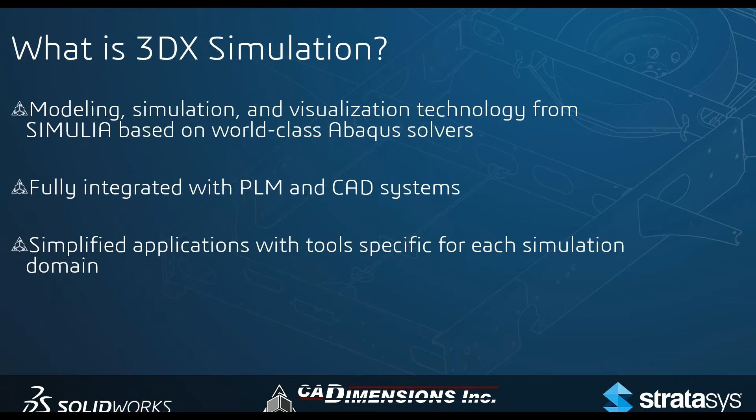And the nicest thing in the last bullet point is it's fully integrated with the 3D experience platform. We'll see that throughout this presentation, where it makes it very easy to collaborate with coworkers, shareholders, whoever you need to get your data or your results to. It makes it very, very easy to run through that.

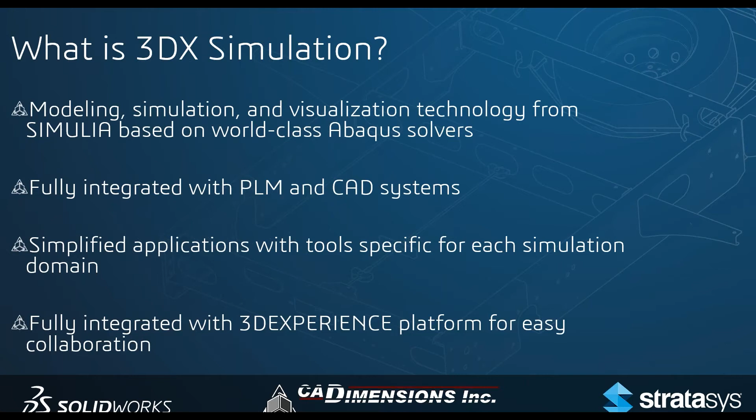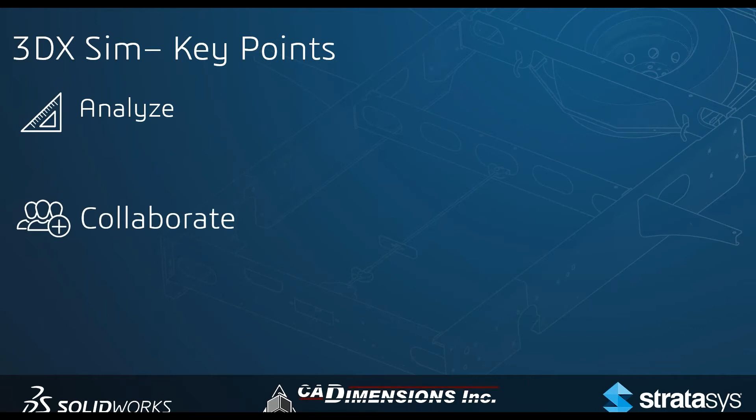In this presentation I've got 3 key points I want to hammer home on 3DX Sim. The first one is analyze—what can we actually do with this software? And then the next 2 we have collaborate and manage data. So we're going to focus more on the first point, and then we'll wrap back up with the last 2 points.

If we take a look at the 3D experience platform, we have several different simulation domains on the platform. The first one is structural simulation. This is the platform equivalent of SOLIDWORKS simulation. We have 3 levels of desktop simulation, if you guys are unfamiliar: simulation standard, simulation professional, and simulation premium on the desktop. The structural domain on the 3D experience platform is very similar—we have several different levels or applications that we can use to access different features.

We also have a new capability expanded earlier this month with durability. We have fatigue studies on the desktop portion of SOLIDWORKS simulation, so we brought that to the platform. So we can now feed our results into our durability studies to make sure that we have fatigue analysis to make sure that our parts aren't failing prematurely.

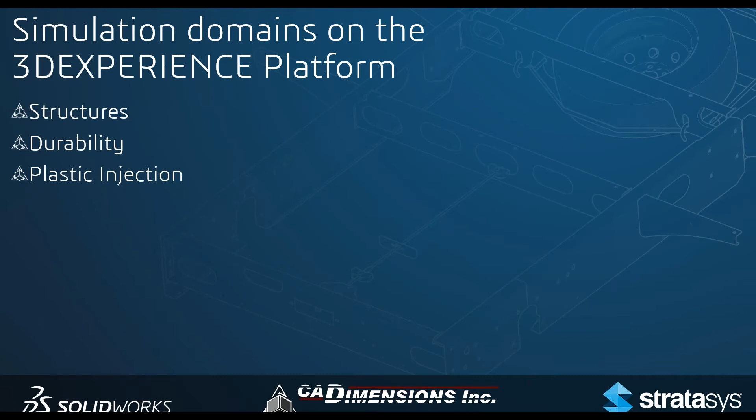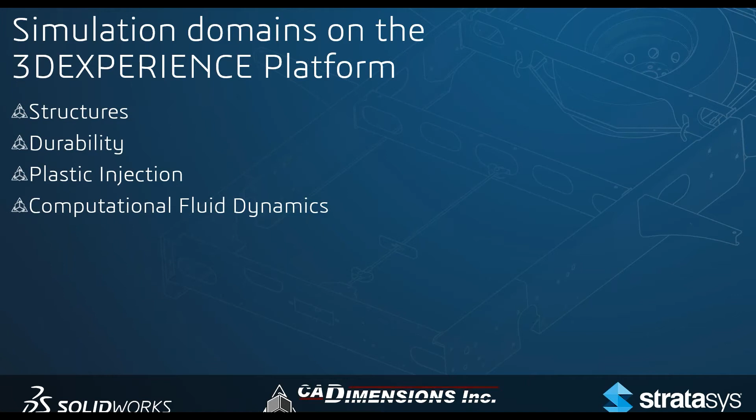We also have more specialized domains on the platform. We have plastics injection, we have a flow simulation role or a CFD role—computational fluid dynamics—and then the last domain is a little bit different because it doesn't actually directly deal with setting up and solving simulations.

What it does is allow us to take a look at the post-processing data and leverage the post-processing so we can access studies that our coworkers have done or studies that somebody else has done, and we can make design decisions based off of that. So I've got 5 different domains that I'm going to cover today, and we're going to go ahead and start with the structures domain.

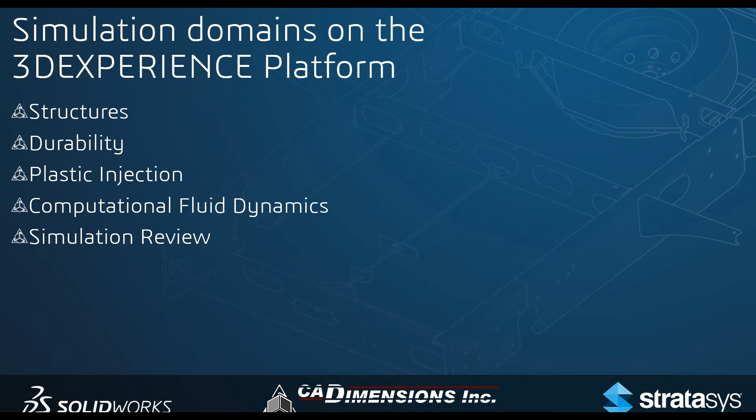The first role, or first segment of the structures domain, is called Structural Designer. This is a nice intro to both simulation in general and simulation on the platform, because it comes with a guided assistant that walks new users through the workflow, whether they're new to simulation in general or new to simulation on the 3D Experience platform. It walks us through everything from creating a study to setting up our mesh, boundary conditions, restraints, and applying material, then we can run the study and look at all the post-processing options, just like on a desktop solution.

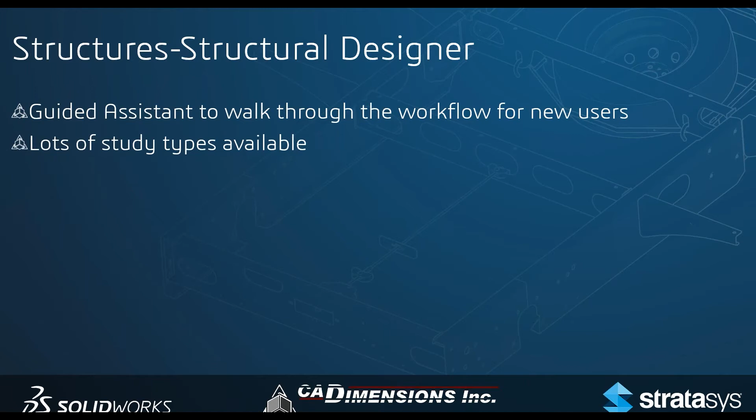The nice thing about Structural Designer is that if you're familiar with SOLIDWORKS Simulation Standard, we really only get linear static studies there. With Structural Designer, we get a bit more - it's a combination of studies from Desktop Simulation Standard and Desktop Simulation Professional. We get linear static stress studies, frequency studies, thermal studies, and buckling studies to see if our parts will fail in a buckling mode. So we get 4 different study types: linear stress, natural frequency extraction, steady state thermal results, and buckling results - more than we'd get with Desktop Simulation Standard.

We have our standard engineering connections that you're already familiar with if you use simulation: pins, springs, bonded connections, rigid body connections, bolt connections - all sorts of tools to help make our studies more robust and physically realistic.

The really nice thing about the Structural Designer role is that we have an automatic mesher, so we don't even have to worry about the mesh because it's automatically created in the background. We do have control over local mesh refinement - we can control element size and mesh controls on faces, edges, and vertices. So we still have control, but the basic mesh is automatically built in the background. In the assistant, the mesh has a green check showing it's already built, and we can take control of it if needed. The automatic mesher is great because we don't have to worry about it.

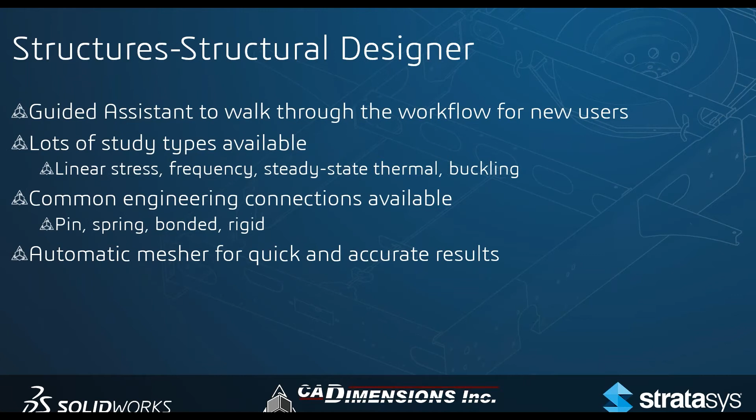We can cross that off the list, and only have to worry about our materials, restraints, loads, or boundary conditions, then run it. This is our base level of structural simulation on the platform. There are 4 different levels to structural simulation, and Structural Designer is the first one.

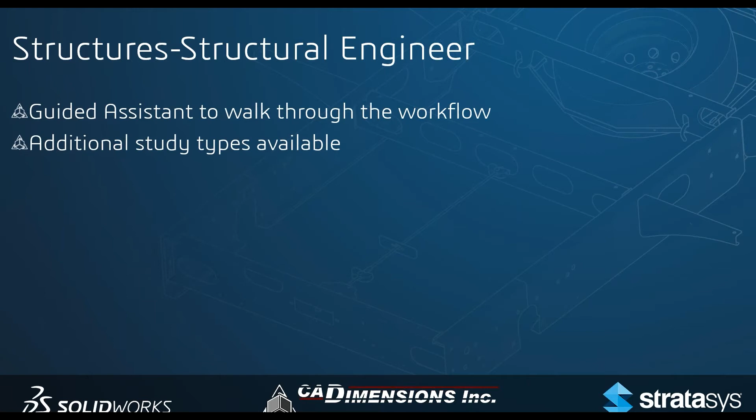The next one is called Structural Engineer, and it's almost exactly the same, except we get access to one more study type. We still have our guided assistant to help walk through the workflow, and we have an additional study type available. We still have linear stress, frequency, steady state thermal, and buckling studies from Structural Designer, but with Structural Engineer we also get access to linear modal dynamic studies - meaning if we're looking for the frequency response of a system or the time-dependent response, we can use Structural Engineer to pull out that information.

All of these levels simply build on each other - we don't take anything away, we only add more in. So with Structural Engineer, we're adding modal dynamic studies. If we needed a frequency response - say we had an engine block subjected to a series of frequencies and needed the load response - we could do that. Or if we knew we had a time-dependent loading condition, we could use Structural Engineer to pull out that information.

Just like Structural Designer, we have a bunch of engineering connections available - pins, bolts, springs, bonded connections, rigid body connections - and we have that really nice automatic mesher. So even though we're increasing the study types available to us, the automatic mesher does a lot of the hard work in the background for us, so we really don't have to worry about it.

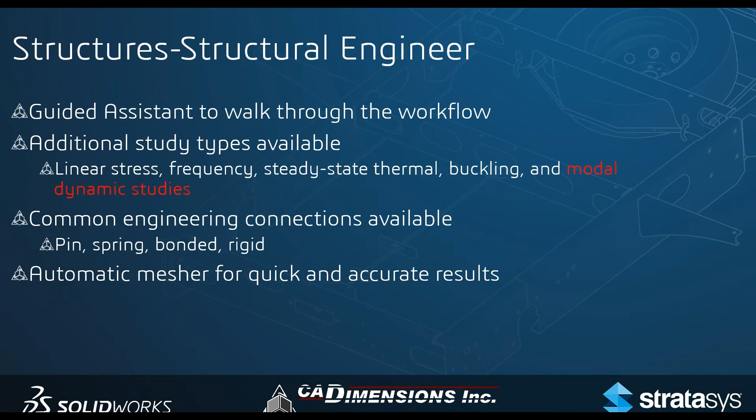The next level of structures is something called structural performance engineer. And this is where things start getting really, really cool.

We have more study types available again. So we've got everything from the previous modules or roles, but now we get into non-linear things. We've got non-linear studies where we can do time-dependent or pseudo-time-dependent loading. We can access more advanced material models like hyperelastic models.

So we could model really complex rubber materials or elastic materials. We can model things like metal plasticity, so if our metal yields, we can model that.

We have something called the Material Calibration app, which we'll see in a second and which is really nice because it allows us to take the raw test data from our tests, maybe feed that in as an Excel file or a CSV file. SOLIDWORKS on the platform will calculate our performance curves or stress response curves for us and calibrate it to make sure we're getting an accurate material response in our simulation.

We also have access to more advanced meshing models. In the first two levels of structures, structural designer and structural engineer, we had only access to tetrahedral or pyramid elements in our mesher, which is what desktop simulation uses, if you're familiar with those.

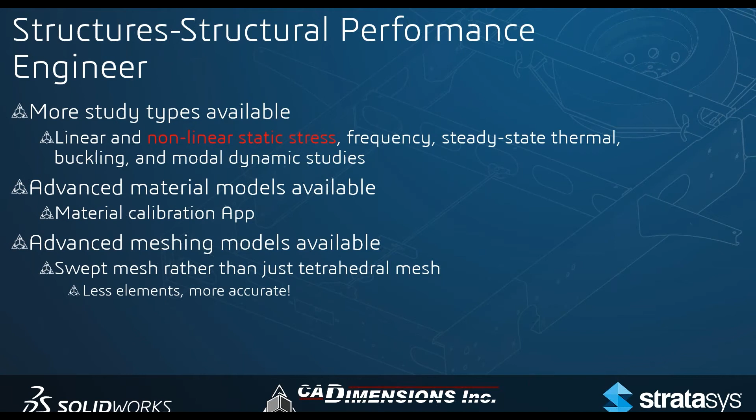The last role, or the last piece of the puzzle in terms of the structures domain on our 3D Experience platform, is something called structural mechanics engineer. This is the full unlock, the full keys to the castle of the power of the 3D Experience platform.

So we have all of our available study types for us. We have linear and nonlinear static analyses. We have frequency analyses, steady state or time-dependent thermal analyses. We have buckling studies, linear dynamics, and something called implicit and explicit dynamics. This is where things get really, really cool.

And we'll see a couple of examples in a few slides. The explicit dynamic solver allows us to model super high energy events like impact events, drop tests, crushing, crash tests, things that we simply can't do, or it would be very prohibitively expensive to do on our current desktop solution. The explicit solver on the platform solves these things no problem.

We also have access to multi-step analyses, so we can actually sequence our loading. If we're dealing with bolt fasteners, we can do a preload step, and then apply the forces or pressures or torques that are going to be applied on our model once the bolts are torqued. So we can do multi-step analyses, or thermal structural interaction, where we have one step where we heat our assembly, and another step where we can calculate the stress response.

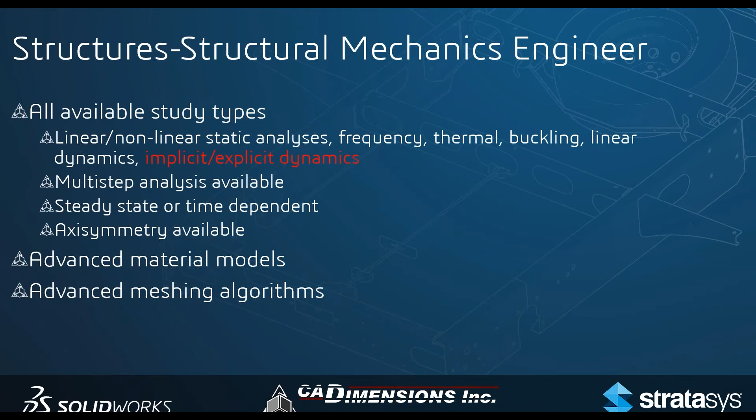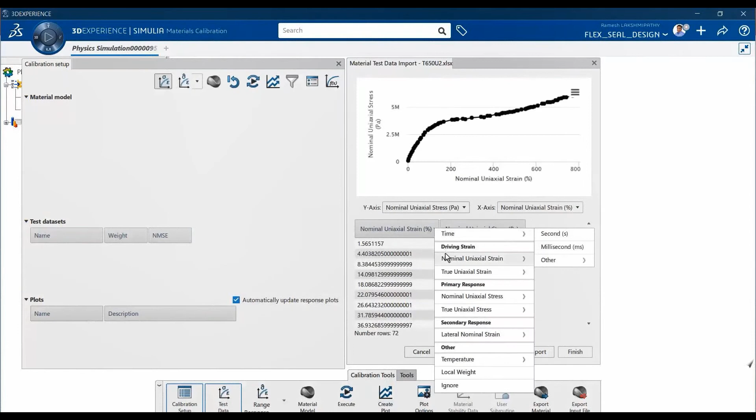We've got our material calibration app here. In this case, we're actually importing raw data right from an Excel file from a test. We can see our material curve, and we can specify whether it's true strain or nominal strain. We import that into the platform, and we specify that we want a hyperelastic material response.

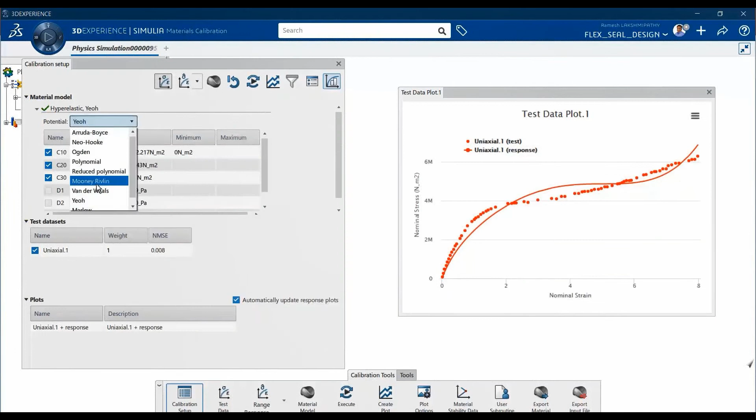In this case, we have different potentials here. We've got the Mooney-Rivlin model, the Yeoh model, and we can see SOLIDWORKS calibrating and trying to fit the curve as best it can. In this case, we're trying the Van der Waals model, and that looks really, really good. But we can take a look at our material stability and see that, at this strain rate, the material is actually unstable. So we're going to go back to the Yeoh model.

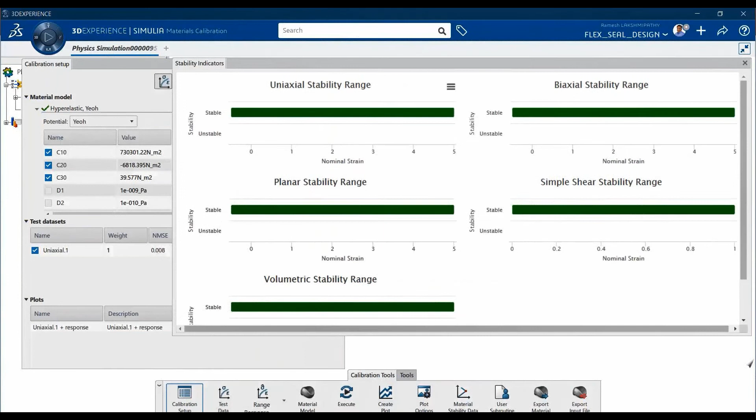In this case, we've got good agreement between the test data and our material curve, and we're stable across all ranges. Then we can go ahead and export this material and actually use it in a 3D Experience simulation. We can take all of the raw data, and in this screenshot we've got the Yeoh model constants, all the different constants that SOLIDWORKS has calculated from our material data. It did all the hard work for us and gave us a material curve that fits our data, so when we use that material in a simulation, we get an accurate material response.

So again, this is our material calibration app with structural performance engineer and structural mechanics engineer. It is super, super cool. I love using this to calibrate rubbers, metals, anything we have test data for. We can feed this in, and SOLIDWORKS or the 3D Experience platform will generate a response curve for us.

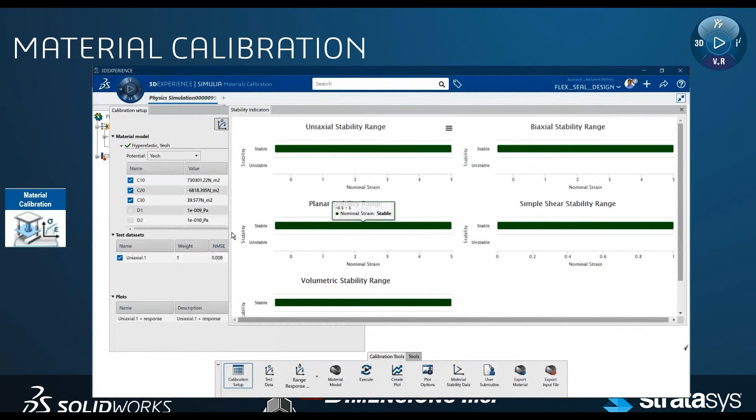The next piece that I love about the 3D Experience platform and structural mechanics engineer is the Explicit Solver. High energy impact problems, like a snap fit on the right-hand side here, or the drop test response of this brace on the left-hand side, would take forever to solve in desktop, if they solved at all. With the Explicit Solver on the 3D Experience platform, this is no problem for the solver to handle. High energy impact problems like a drop test or a snap fit, they don't even flinch in terms of actually getting the solution for us.

So the Explicit Solver in structural mechanics engineer is one of the coolest things that has been added in terms of simulation that we have access to, in my opinion. We've got super high energy snap fits, and we've got this drop test here. We can see as it starts to rebound from the floor, it starts to kind of resonate. We've got advanced material models in here as well.

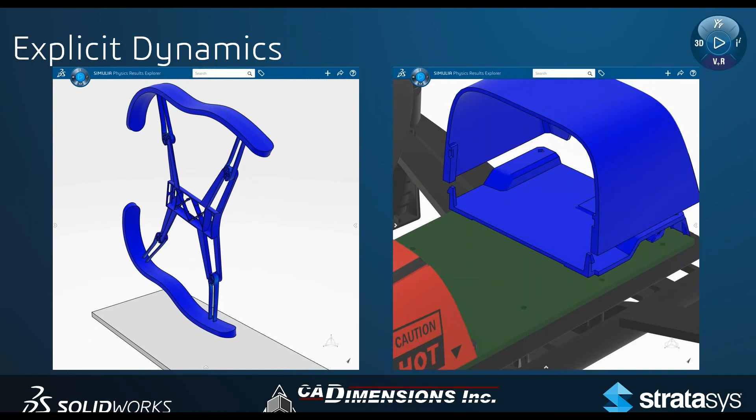We've got everything we need to handle basically whatever we need to simulate. We can do a whole bunch of things in the structures domain. And I haven't even talked about the plastics domain or flow simulation yet. We're still focusing just on structures. We can do things like bird strikes, damage modeling.

One of the really nice things about the structural aspect on the 3D Experience platform is we can now model damage like this. On desktop, the mesh doesn't actually update once it's generated. On the 3D Experience platform, we can update the mesh and remove elements that have been damaged too much, and we get results that look exactly like that, where the blade actually starts to fracture. So we can model things like necking and fracture, and do all sorts of things we simply can't do on desktop.

We can do super high energy impact things like door crash or a drop test on this prosthetic foot. Things like this would be very difficult and time consuming to solve on our current desktop solutions, where the 3D Experience platform doesn't even really flinch at it.

We've got really super complex contacts and buckling of this elastic seal, where to define all of these different contact sets in SOLIDWORKS desktop would take forever. We'd have to guess and check and make sure everything's working correctly.

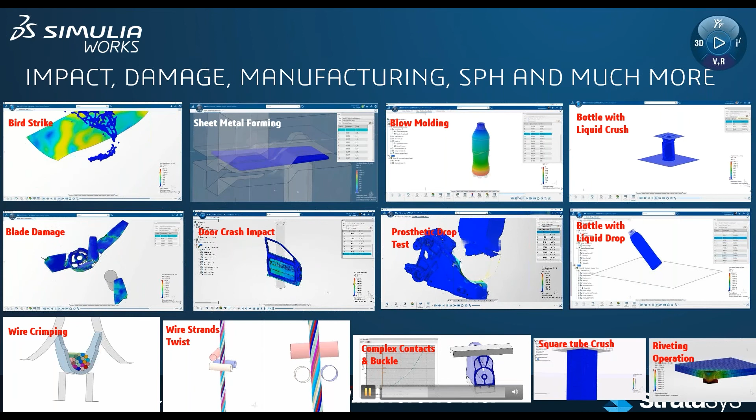We can do all sorts of advanced deformation, like this square tube being crushed. All of this complex buckling phenomenon down here just simply would not be possible in the current desktop solution.

One of the other really nice pieces they added to the platform is the ability to model liquid particles. In this case, we've dropped a bottle that's got liquid sloshing around it. This is due to a technology called SPH particles, or smoothed particle hydrodynamics, where we can actually model the effect of having liquid inside of our bottle.

In this example up here, rather than dropping it, we can actually crush the top of the bottle and watch the liquid shoot out. We simply can't do this in the current desktop solution.

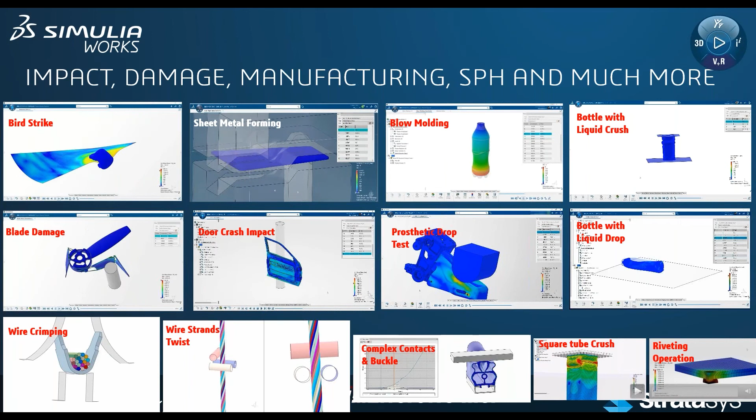So we can actually open up a whole new class of problems on the 3D Experience platform thanks to our Explicit Solver. We can do sheet metal forming, thermoforming - we can thermoform plastics. We can do all sorts of really advanced, high energy impact, high deformation, non-linear problems without much trouble on the 3D Experience platform. So it is a super powerful tool that allows us to grab a different class of problems that were not feasible, or were very difficult to solve, on desktop.

Moving into the durability domain, these are really kind of add-ons for the structural domain. We've got two different roles, or two different levels, of durability. The first is simply durability performance engineer, which is structural performance engineer plus fatigue. So all of the studies I had covered before - we have linear and nonlinear static stuff, frequency, thermal, buckling, and linear dynamics.

The durability performance engineer role allows us to feed these results directly into a fatigue study, just like we would in SOLIDWORKS desktop. So we run one of these study types first, then we can feed them directly into a fatigue study - again, just like SOLIDWORKS Desktop. So the workflow is very similar. The advantage is that we have our advanced material models because we're working with structural performance engineer, plus our advanced meshing algorithms. Everything from structural performance engineer carries over, and then we just have the ability to feed those results into a fatigue study to make sure we're meeting our durability requirements.

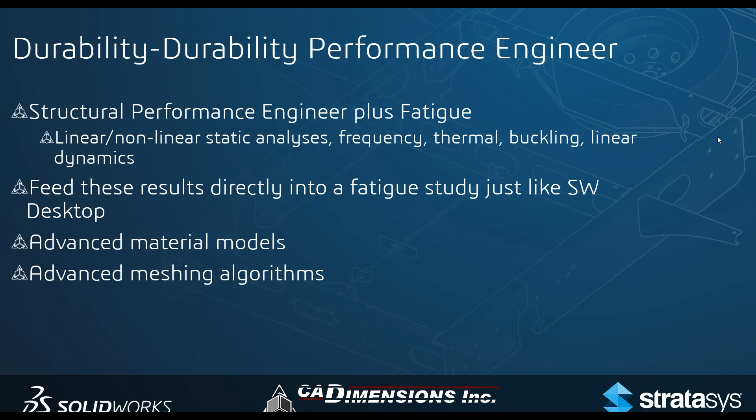The next level of durability is exactly the same thing. We have durability mechanics engineer. And if you've been following the pattern, it's simply structural mechanics engineer plus fatigue.

So all of the different study types we have available - our linear and nonlinear static, frequency, buckling, thermal, dynamics, our implicit and explicit dynamics, our multi-step, steady state, or time dependency - we can just go ahead and feed those directly into a fatigue study to get our life requirements. We have our advanced material models and our advanced meshing algorithms.

So the structures and fatigue, or the structures and durability domains on the 3D Experience platform are very closely linked, just like the study types in SOLIDWORKS Desktop Simulation. We have our studies for our simulation, and then we can go ahead and feed that directly into our fatigue model as an event. So just like they would be on desktop, they are very closely linked on the 3D Experience platform.

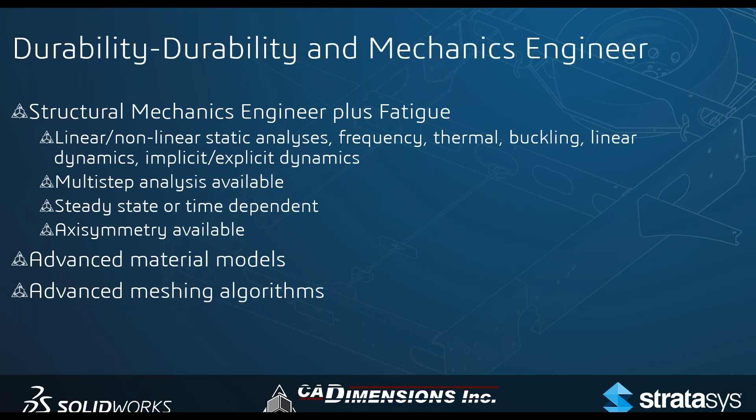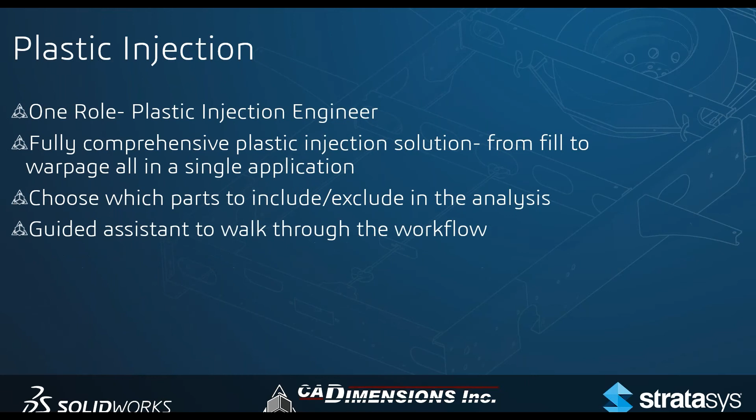It's a fully comprehensive plastic injection solution. We can go from fill, pack, cool, and warpage all in one single application. Really, really easy. We have a guided assistant. We can choose which parts to exclude or include in the analysis. We can say, okay, these are my cooling systems, these are my plastic parts. I've got a virtual mold right around the part. And again, we have our guided assistant to walk through the workflow.

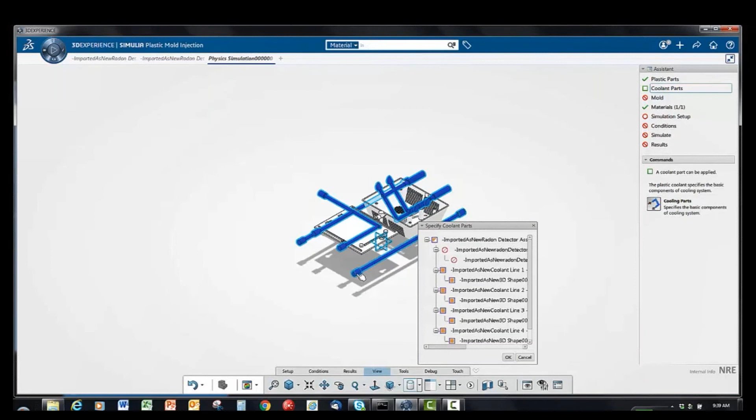So in this case, we've got a little bit of a demo here. We can see our assistant on the right-hand side. We're specifying that the white parts are plastic parts. We've modeled the blue parts as our coolant lines, so we can just go ahead and pick right from the graphics area that those are our coolant parts. We've got a virtual mold set up, and we can see that bounding box around the parts. We're applying our materials to our plastic, and we're applying steel to our mold here.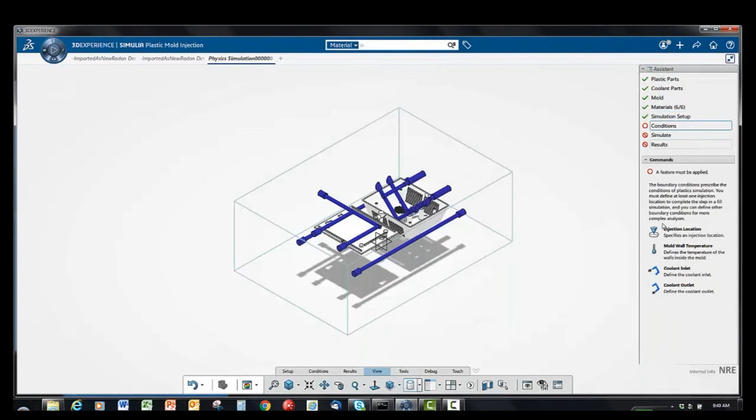And then we can just go ahead and set up our simulation. We can specify our fill time, our pack and cool times. And then all we need is our boundary conditions - we need an injection location at the top of our runner system. And then we're going to go ahead and specify our coolant inlets and outlets, because we need to tell the platform where my flow is coming from and where it's actually exiting my coolant line, so we can do all of our heat transfer calculations.

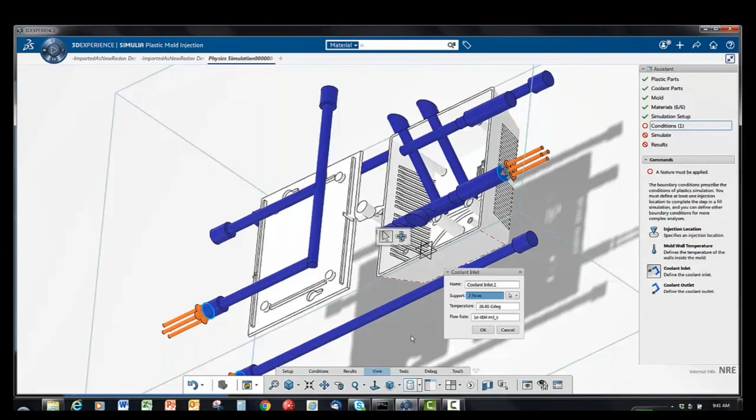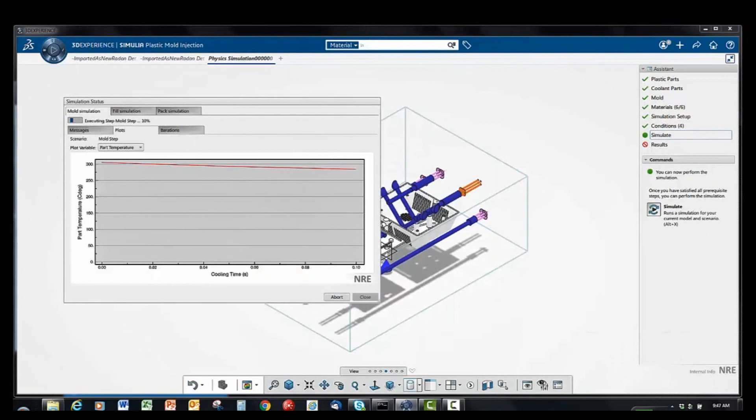So we can see the assistant works our way through and helps us on the workflow. We can just go ahead and open up the part. We're going to say, all right, this component is plastic, these components are my coolant lines, this is my mold. We don't even have to use the mold if we don't want to, but in this case, we're running a full mold simulation. So then we can just go ahead and simulate this, monitor our simulation, and then take a look at our results.

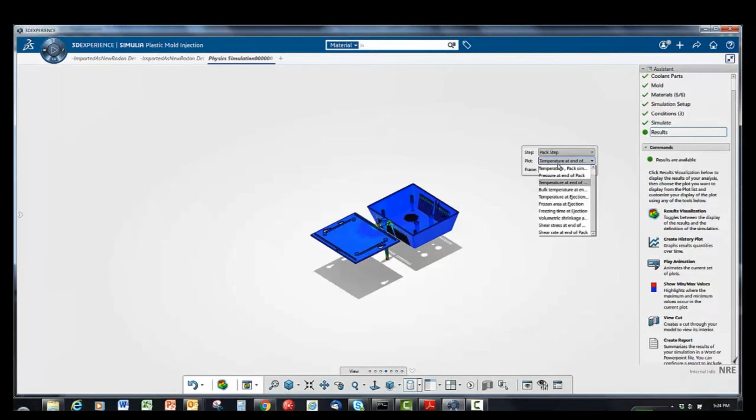Each step is broken out just like it would be on desktop, where we can see at the top we have our fill step. We would also have our pack and cool steps, and we can plot different things. All of the results we would get from desktop plastics we get on the platform - the temperatures, flow fronts, pressures, fill times, really anything we might need in order to more efficiently optimize either our plastic part or our mold are handled right inside of the workflow.

And the same really goes for our fluid dynamics role or flow simulation role. In this case, we've got one role.

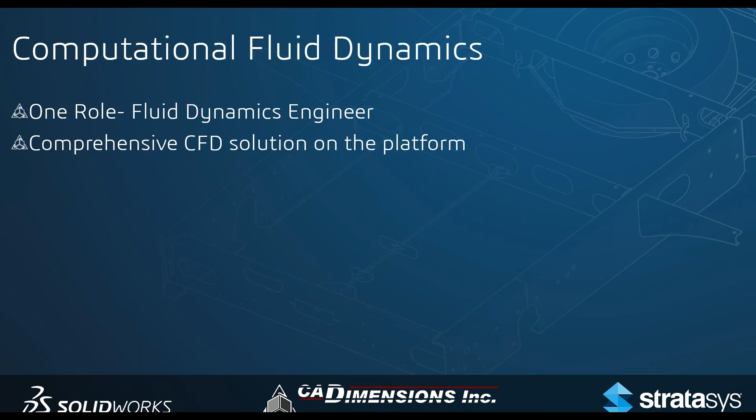Aptly named Fluid Dynamics Engineer, this is our comprehensive CFD solution on the platform. Everything that desktop flow simulation can do, the platform offering can do as well. We can do all of our heat transfer, rotating regions, all sorts of stuff. But we've got this really nice guided assistant to walk through our workflow.

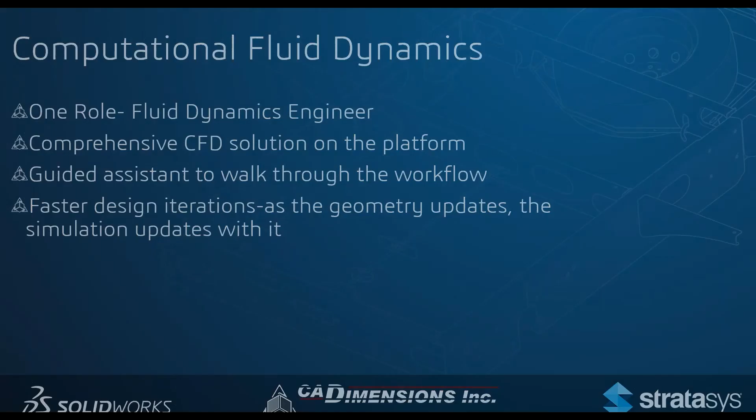The advantage of using the platform is we get a tighter design iteration cycle, where as the geometry updates, the simulation updates right with it. In this case we're going to see exactly that, looking at the intake or exhaust manifold of a motorcycle.

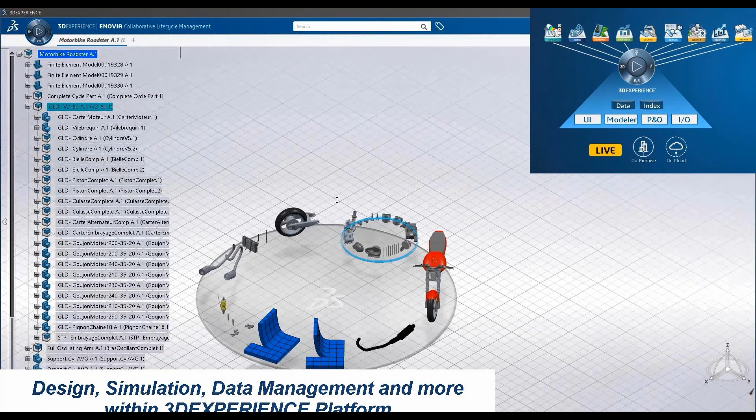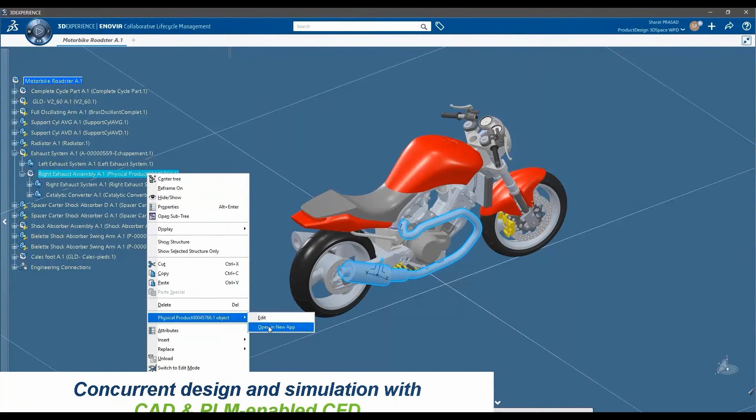We've got the motorcycle opened up on our platform, and we can break it out into each subassembly, seeing all the different components. In this case we're looking for the exhaust subassembly, and we can color code each one to make sure we're working with the latest revision. We're looking for the simulation we want to open up, find the exhaust assembly, open it up, and this is what we're actually going to be modifying. We're going to create our fluid simulation using our workflow and assistant.

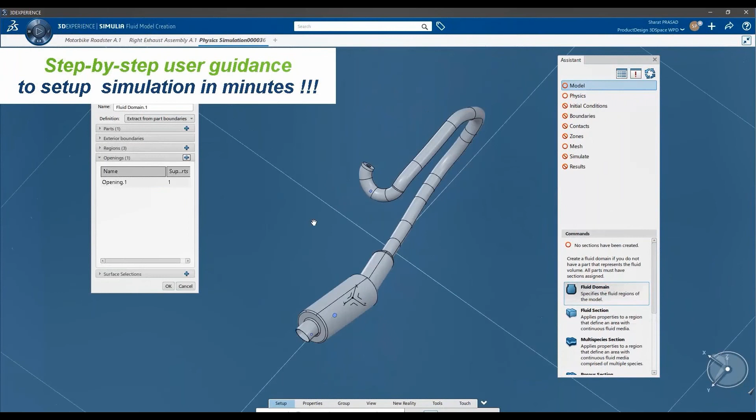We're going to create our fluid domain just like we would in SolidWorks. In this case it's even easier because we don't have to create any lids, since we get these abstractions where the platform will pop a lid right on the end. We'll specify our materials for our porous media—in this case there's a filter in the exhaust system or a catalytic converter, so we've specified that.

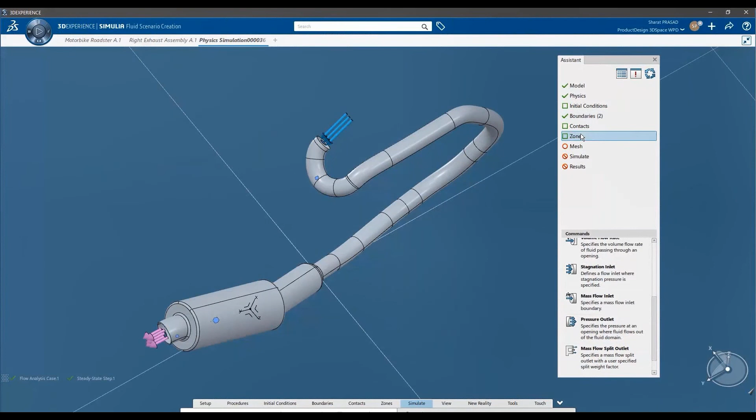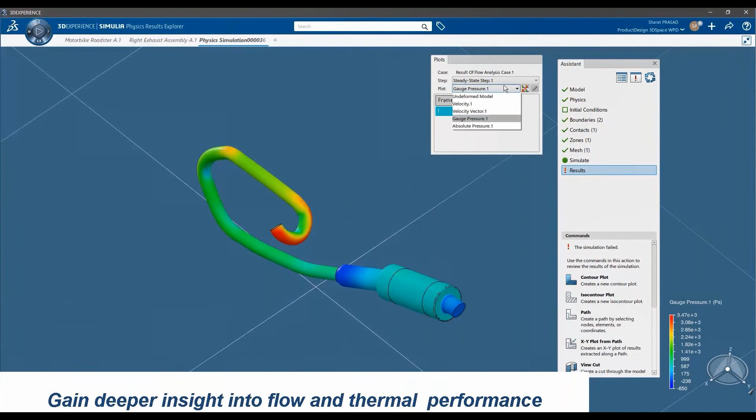We'll define a steady state step, set our boundary conditions for inlet and outlet, and specify the properties of our porous media. Then all we have to do is mesh and run. The mesh is really nice because there's automatic body fitted mesh, meaning we press one button and the platform reads the dimensions from the model and creates an appropriate mesh automatically. Then we can run and visualize all of our different results.

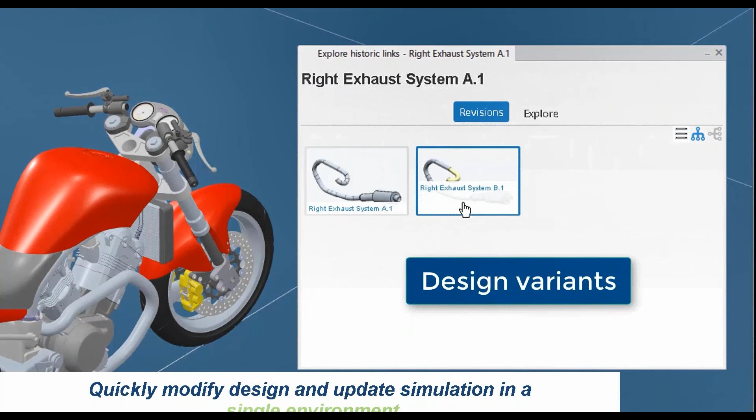In this case we're looking at pressure—we've got our iso plots, contour plots, and some streamlines in here. Then we're going to replace this exhaust with a different revision. We've made a design change, going from revision A to revision B, and if we replace it in our simulation, it will update automatically.

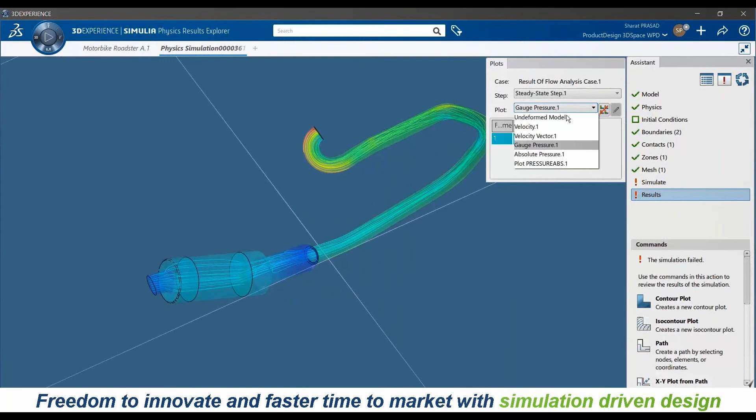We don't even have to do anything other than rerun the simulation—we don't have to set it up again, we don't have to do anything like that. We can simply submit the simulation for solving and take a look at the design improvements. We have the freedom to innovate because our simulation is tied so tightly to our geometry that we don't have to work on setting up a simulation again. We can just replace it with a different revision, and the 3D Experience platform will take care of the rest, updating our geometry very quickly.

The last part of that video, true for all simulation roles—structures, plastics, and fluids—is the ability to solve on the cloud, which is a huge time saver where we don't have to deal with making sure our hardware is up to date. We can submit our simulations for solving on remote servers where we specify the number of cores we want to use—the more cores, the faster our solution solves. We could also solve on local hardware if it's a small simulation or if we're confident in our hardware.

The advantage of doing this as a cloud-based technology is it's instantly scalable. If we have a mesh that's really large, several tens of millions of elements, we can utilize Dassault Systèmes cloud resources and submit the job using 64 cores rather than the 8 cores on our machine, scaling our solve time appropriately so we get faster turnaround and can make design decisions faster. We can do all sorts of stuff like that.

So I did want to mention that before we jumped into simulation review, because this role is a little bit different. Again, we're not dealing directly with any of the simulation roles. In this case, it's more of a post-processing where we can feed the results we used in the first couple of domains, and use these to make design decisions instead. This role is called Simulation Collaborator, and we can use it to conduct performance trade-offs.

If you guys have used a design study in SOLIDWORKS Simulation, this interface is fairly similar. It should look familiar. We can share content with coworkers and stakeholders across the world. The nice thing about the Simulation Review app is that it's actually browser-based. You don't have to leave your internet browser. The other domains, the other applications I've shown off so far, all have a local installation on your machine.

So the data is cloud-based. All of the simulation data, the parts files, all of that will live on the cloud, but you actually pull that data onto your machine to run and set up these simulations. We can run them on the cloud, but all of that requires a local install. The simulation review role, or the simulation collaborator role, is all browser-based. So you can do everything in your web browser and share with coworkers, stakeholders, shareholders, whoever you need to share that data with. This next video will also highlight the other 2 points I had at the beginning of the PowerPoint.

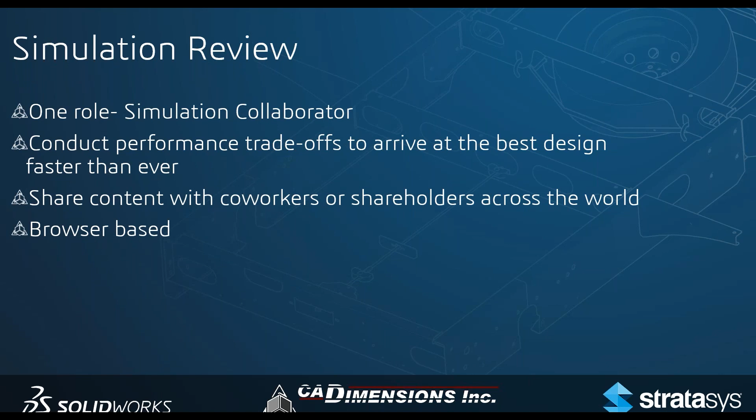Our collaboration and our data management. It makes it very easy to share our design information, especially in today's environment. We've got 6 or 7 different people working on the same project with file-based PLM or file-based lifecycle management. All of the files might live on a central server, or in a vault somewhere, and everyone is all over the world. We've got suppliers in Asia, modeling specialists in Europe, the requirements manager in North America, and a lot of this stuff involves emails back and forth. We need to wait for approval, we need to make sure somebody's read the email. There's a lot of steps to this process.

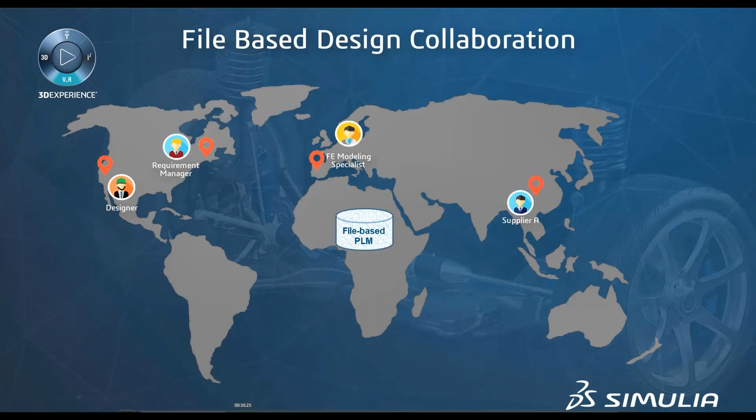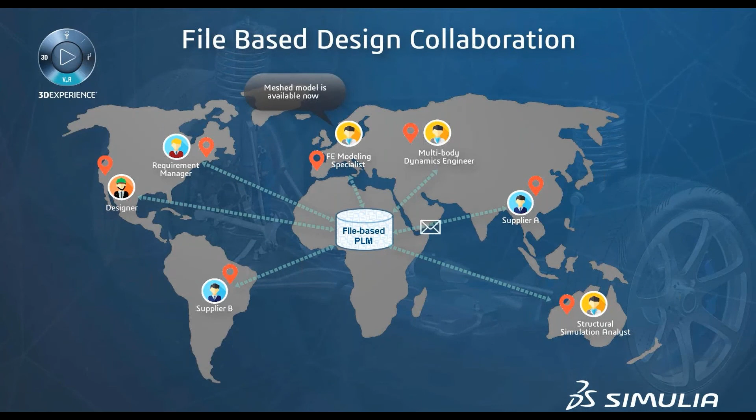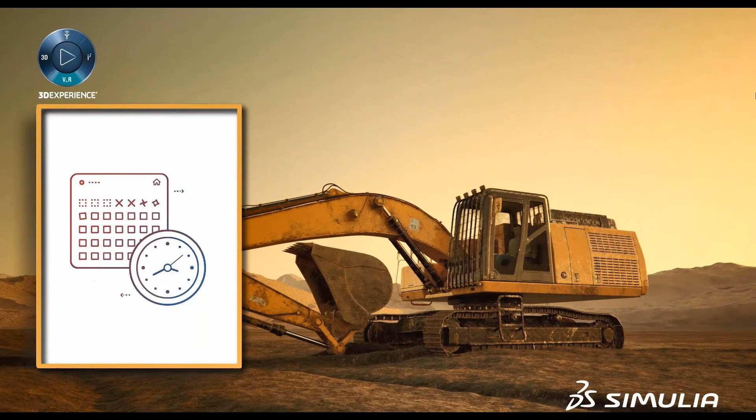With the 3D Experience platform, everything is much easier to handle because it's really a live platform where everyone gets notified when everything else is happening. We're going to take a look at our emails again, but with the 3D Experience platform, you actually have a notification section where you can have conversations with coworkers, and set up specific teams to work on different projects. We can save our time, we can save our money, because everything is accelerated and we can innovate faster and faster.

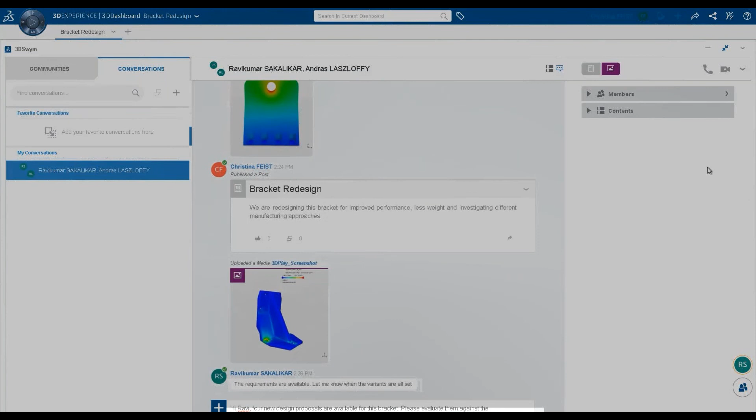So in this case, we're in the Simulation Review app. We've got 4 different versions of our bracket and we want to make a change. So I can say, hey Ravi, I've got 4 different proposals, can you please check them and make sure that they're correct? He's going to drag all the results into our performance trade-off app.

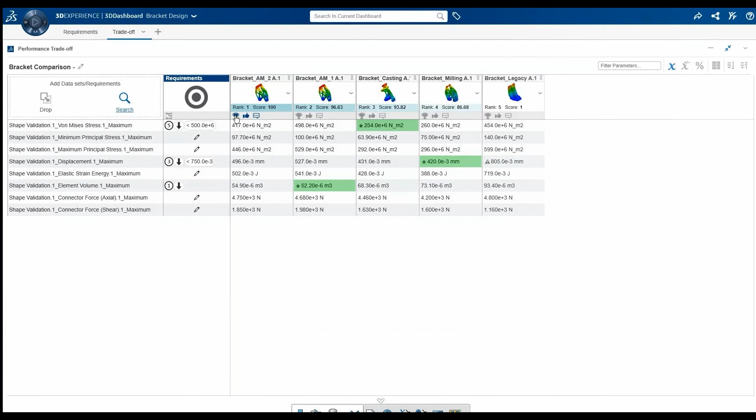We can see our requirements on the left-hand side, like I need my maximum stress to be less than whatever, I need my von Mises stress to be less than. I can pop those out into individual windows where I can make decisions very quickly. In this case, he's actually voted on the one that makes the most sense, and he's going to go ahead and share this with Christina so she can see exactly what he sees.

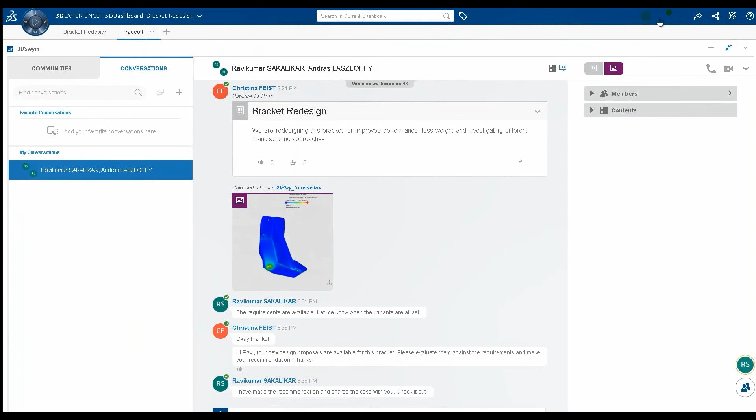From Christina's end, he's going to make her aware, and she's going to get a quick notification that Ravi has shared a file with her. She's going to open that up and see exactly what he sees. So the collaboration is even faster, because we don't have to put this into a report, we don't have to put this into an email. Everything lives on the 3D Experience platform.

So we can have conversations, we can have teams, we can do a lot of our work on the browser, where we can make our decisions very quickly because we're not jumping back and forth between our internet browser, our email, our calendar. Everything is built into one platform, which makes things really nice.

And again, that hammers home our analysis, right? Because we have full capabilities of the Abaqus solver, where we can do things we couldn't do in desktop, and do them quicker. We can do all sorts of things. We've got domains for everything, right? We've got structures, plastics, flow, all sorts of stuff. We've got our collaboration, we've got our data management, everything is cloud-based, so you always have the latest version, no matter where you are.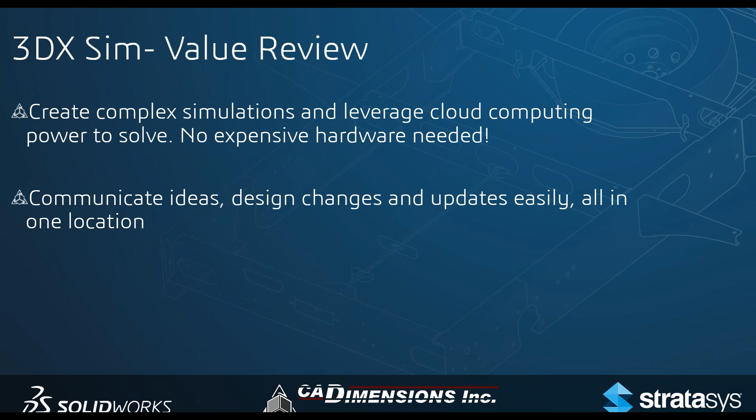In terms of sim-specific value review, we've got complex simulations, we've got cloud computing. We don't need to make sure we have the latest and greatest hardware, because hardware moves very quickly. You could buy a new computer now, and in 6 months it's already outdated. So we don't have to worry about keeping up with our IT infrastructure, because we can leverage our cloud computing options. We can communicate our ideas, design changes, and updates very easily, all in one central location on the 3D Experience platform. And with that, we can manage our simulations and all of our other CAD data on the cloud.

The really nice thing is, if we need to make a change to our geometry, we can pull our data into SOLIDWORKS that we all know and love. It's the same modeling program. We can go ahead and make our changes, save our data right back up to the cloud, open up our simulation, do a quick refresh or rebuild, and those changes will be easily propagated. Our boundary conditions won't change. We can go ahead and rerun the simulation, and we've got things faster than ever.

So everything lives on one central place, and we can do different things. We can do our data management, we can do our simulation, we can do all sorts of stuff, all on the 3D Experience platform. So that's all I've got, guys.

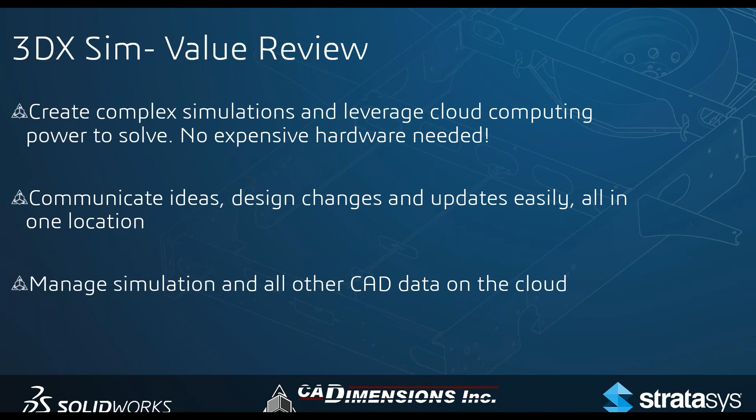All right, the first question I got from Craig: how does the cost model of 3D Experience compare to the desktop apps? That's a great question, Craig. The really nice thing about the 3D Experience platform is, because it's a live platform, you're paying for access to a service. The pricing model is a little bit different. Rather than paying upfront for the cost of a SOLIDWORKS license and then the yearly maintenance for whatever product you're working on, the 3D Experience platform is more like a lease, where you can pay for, I think, 3 months or yearly access. So you can pay quarterly if that's something you'd rather do. If you need it for a big project, or something coming up, you can pay quarterly, or there's a yearly price. I'm not sure exactly how the price breaks down versus specific simulation products. I know off the top of my head, I believe 3DX Plastics is a little bit cheaper than the desktop version for 1 year, but you're paying basically the full price yearly, because you're leasing yearly, versus the desktop solution where you pay most of it up front, and then just a yearly maintenance fee or rent. So the pricing model is a little bit different.